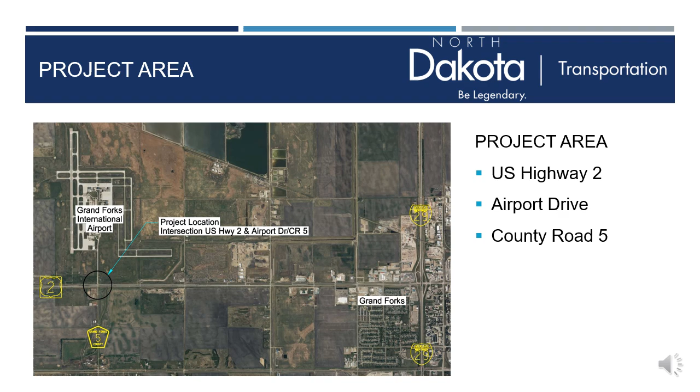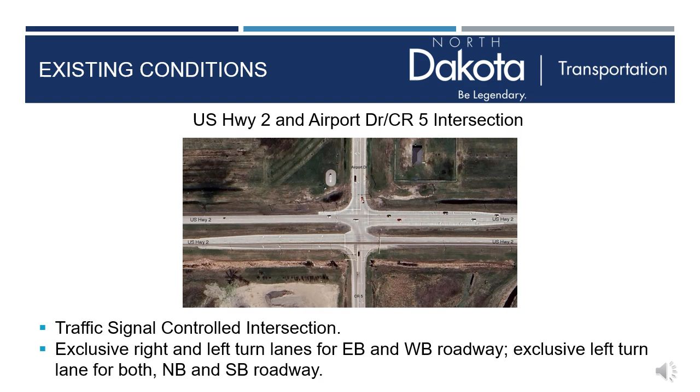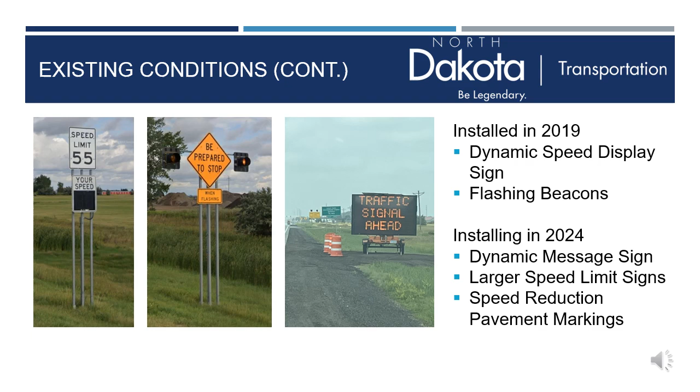The intersection is signal controlled and has exclusive right and left turn lanes for the eastbound and westbound roadways. The connecting roadways, Airport Drive and County Road 5, only have exclusive left turn lanes. Additional devices were installed in 2019, such as the dynamic speed display signs and the flashing beacons. Further changes are planned for 2024 with the placement of dynamic message signs, larger speed limit signs, and special speed reduction pavement markings leading up to the intersection.

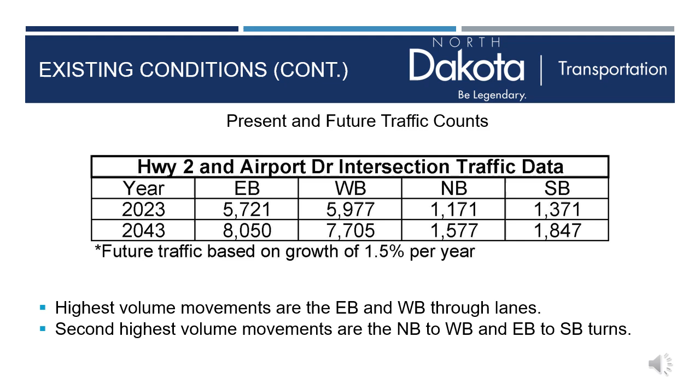This slide shows the present and future traffic counts for the intersection. Further breakdown of the traffic counts shows that the highest volume movements are the eastbound and westbound through lanes. Next are the northbound to westbound and eastbound to southbound turners. These vehicles go to and from the Air Force Base, located approximately 9 miles west of this intersection. Next are the southbound to eastbound and westbound to northbound turners. These vehicles go to and from the airport.

This slide shows the history of crashes that have occurred at this intersection. On the Rural Spot High Crash Location list, this intersection was ranked number 11 out of 25 in 2023, with 45 crashes occurring in the past decade. 12 of those crashes occurred during non-dry conditions, such as wet or icy roads. In the years 2020 and 2021, 14 crashes occurred during road construction, 13 of which were rear-end crashes.

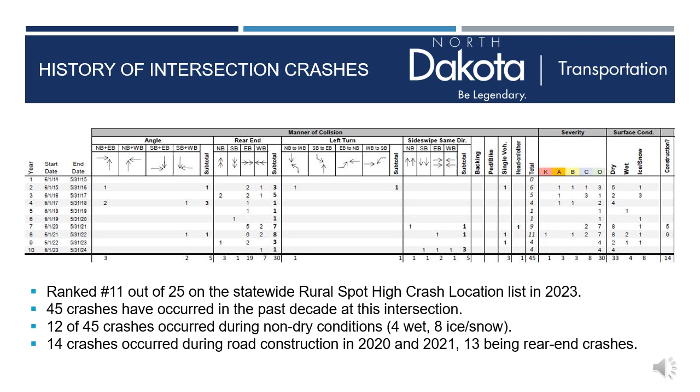Several studies were conducted to analyze this intersection and determine what improvements could be made. In 2014, the NDDOT completed a local road safety plan, and the Grand Forks Metropolitan Planning Organization completed a US Highway 2 Access Study Report that included this intersection. After that, the NDDOT completed a road safety review in November 2017 and 2 traffic operations studies, one in 2019 and another in 2024.

One aspect of analyzing intersection crashes is determining the conflict points. Conflict points are locations where vehicle paths overlap each other. Crossing conflicts are generally more severe than merging or diverging conflicts since vehicles are moving in opposite directions. Conflict points can be used as a safety factor when evaluating intersection configurations, and reducing conflict points can help reduce crashes.

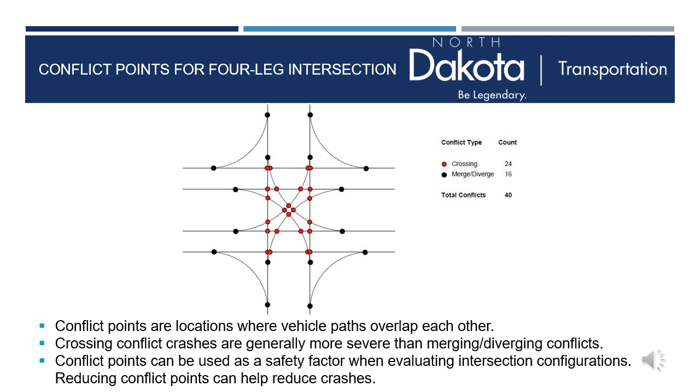Another way to analyze an intersection is to determine the level of service, or LOS. The level of service of a signalized intersection is an assessment based upon the average control delay per vehicle. Currently, the existing intersection has an overall level of service of C.

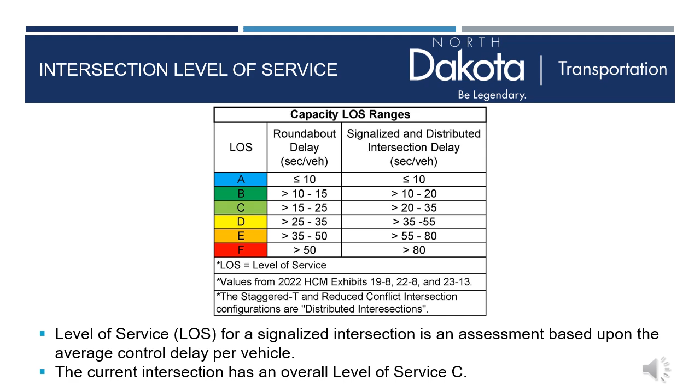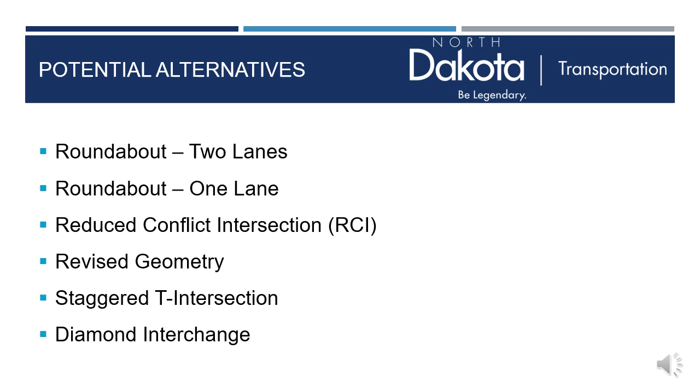This presentation will review 6 potential alternatives: a roundabout with a 2-lane configuration, a roundabout with a 1-lane configuration, a reduced conflict intersection, or RCI, a revision of the existing intersection geometry, a staggered T intersection, and a diamond interchange.

The first alternative is reconstructing the intersection into a 2-lane roundabout. This type of intersection has gained popularity within the last decade. As drivers approach the intersection, they will have to slow down and possibly yield to traffic before entering the intersection, driving around before exiting at their desired road. Including right-turn lanes with this intersection should help with the flow of traffic.

The estimated cost for this alternative is $6 to $7 million and has an estimated construction time within the next 4 years. The advantages for this alternative would include increasing the level of service for the intersection to level A, reducing the number of conflict points from 40 to 16, and reducing crash potential. It would also provide greater operational advantages than the existing intersection configuration, allowing for fewer stops and hard accelerations, reducing idling time, and providing consistent speed for all movements. Long-term cost effectiveness is also an advantage.

The disadvantages include that this alternative would require acquisition of permanent right-of-way and complex construction phasing. While it does provide fewer stops, traffic will need to slow down and yield before entering the roundabout, and larger trucks may encroach on the adjacent lane.

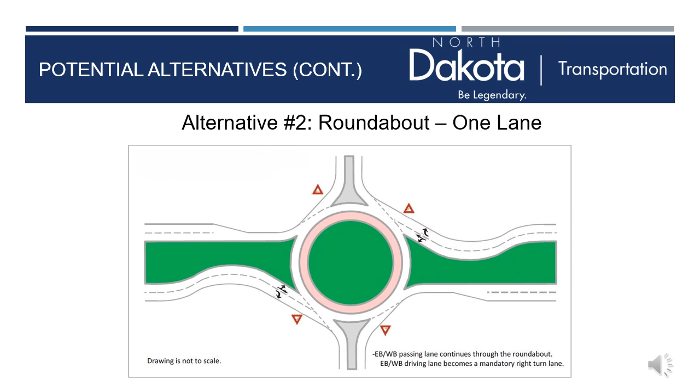The estimated cost for this alternative is $5 to $6 million and an estimated construction time within the next 4 years. The advantages for this alternative would be increasing the level of service for the intersection to level B, reducing the number of conflict points from 40 to 12, and reducing crash potential.

It would also provide greater operational advantages than the existing intersection configuration, allowing for fewer stops and hard accelerations, reducing idling time, and providing consistent speed for all movements. Long-term cost effectiveness is also an advantage.

The disadvantages include that this alternative would require acquisition of permanent right-of-way and complex construction phasing. While it does provide fewer stops, traffic will need to slow down and yield before entering the roundabout, as well as requiring through traffic to merge into the left lane before entering the intersection.

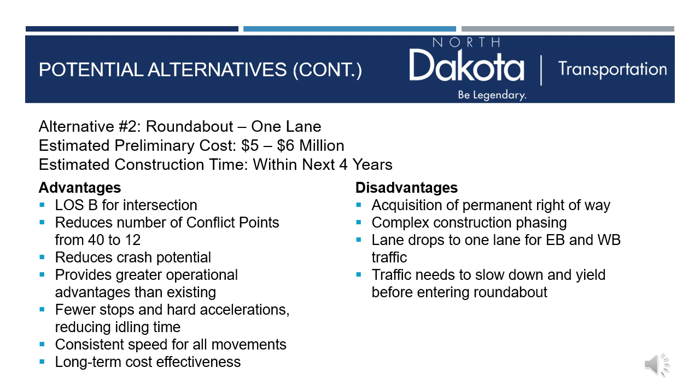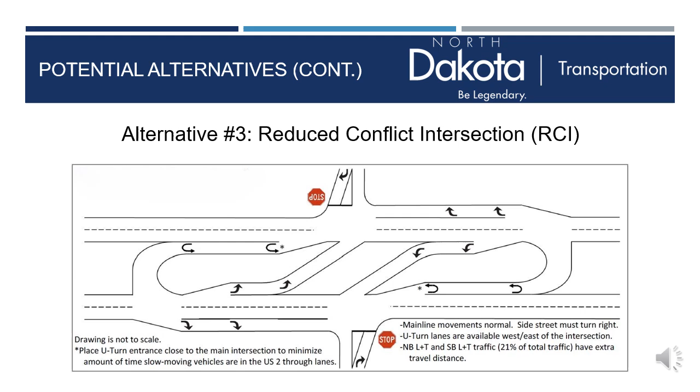The next alternative is reconstructing the intersection into a reduced conflict intersection, or RCI. Traffic on Airport Drive and County Road 5 needing to turn left would be forced to turn right first, then use the provided U-turn area to merge onto their intended direction. Through traffic on US Highway 2 would maintain a continuous flow. The estimated cost for this alternative would be $1 to $2 million and an estimated construction time within the next 4 years.

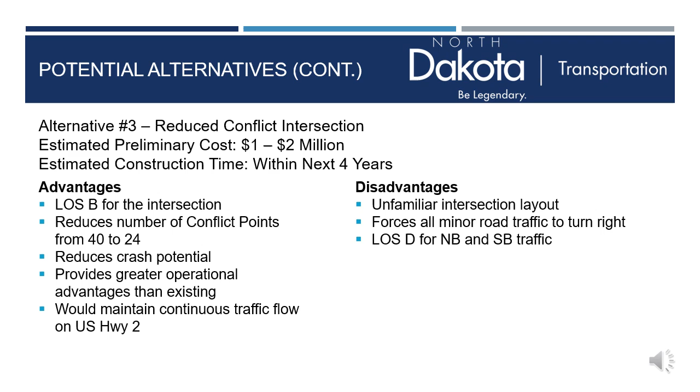The advantages for this alternative would be increasing the level of service for the intersection to level B, reducing the number of conflict points from 40 to 24, and reducing crash potential. It would also provide greater operational advantages than the existing configuration and would maintain continuous traffic flow on US Highway 2. The disadvantages would be that this is an unfamiliar layout. This configuration forces all minor road traffic to turn right, reducing the level of service to D for northbound and southbound traffic.

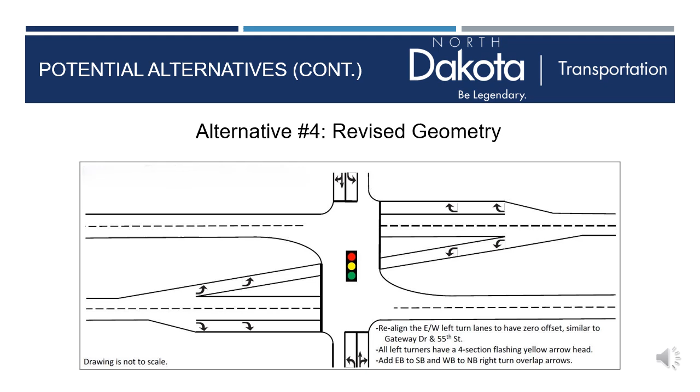The next alternative is revising the geometry of the existing intersection. The main change would be realigning the left turn lanes so that they have zero offset. The existing traffic signal would remain, but the signal heads would be changed. The left turn signals would be replaced with a 4-section flashing yellow arrowhead, and the right turns would have an overlap arrow signal installed.

The estimated cost for this alternative would be $400,000 to $500,000 and has an estimated construction time within the next 4 years. The advantages for this alternative would be no acquisition of permanent right-of-way, allowing for better sight distance for left turn vehicles and storing the left turn traffic farther away from the adjacent mainline traffic. The disadvantages would be that this option does not address the issue with traffic stopping on US Highway 2 and keeps the number of conflict points and level of service at the same level as the existing layout.

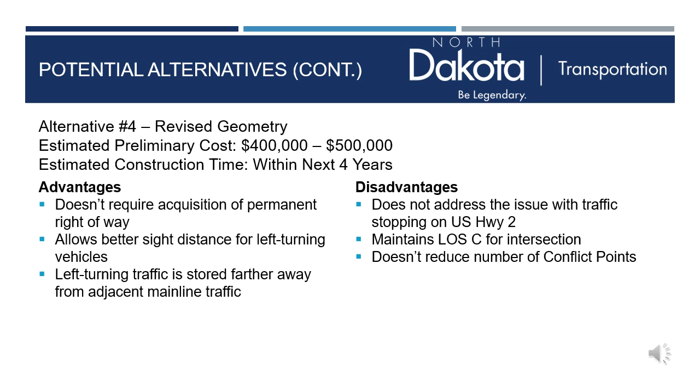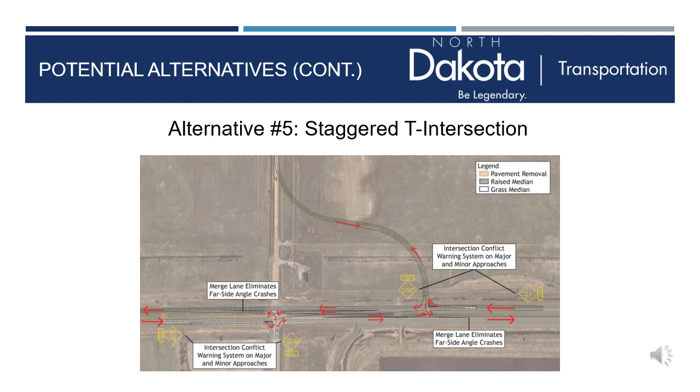The next alternative is reconstructing the intersection into a staggered T-intersection configuration. The airport approach would be shifted roughly 1,000 feet to the east and the traffic signals would be removed. In place of that, the intersection would be two-way stop controlled with the mainline traffic no longer required to stop. New auxiliary lanes would be used to merge left turns onto the main line. An intersection conflict warning system will be implemented to warn drivers on the main line and side streets of a potential conflict.

The estimated cost for this alternative is $3 to $4 million and has an estimated construction time within the next 4 years. The advantages for this alternative would be increasing the level of service for the intersection to level B, reducing the number of conflict points from 40 to 22, and reducing the crash potential. It would also provide greater operational advantages than the existing configuration and would maintain continuous traffic flow on US Highway 2. The disadvantages would be the large impact to the northeast quadrant, requiring acquisition of permanent right-of-way, changing Airport Drive and County Road 5 to stop-controlled approaches, and reducing the level of service for traffic on County Road 5 to level F.

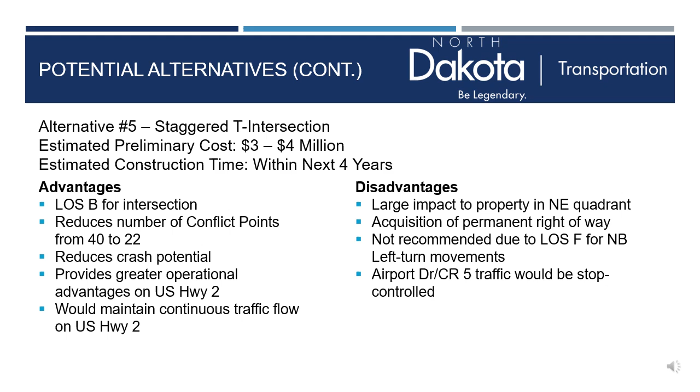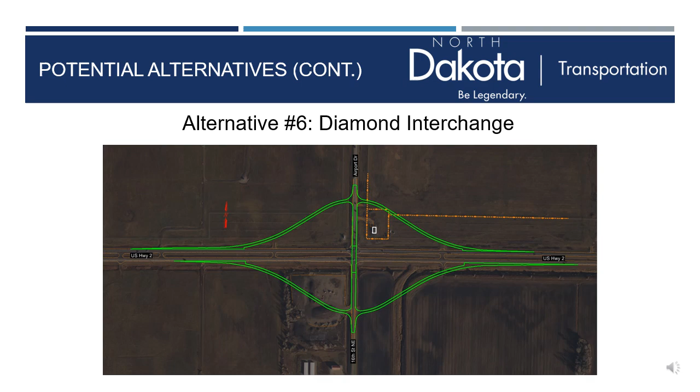The last alternative to present is building a diamond interchange to replace the existing intersection configuration. This would operate the same as other interchanges and would require exiting traffic to stop at the ramp intersections and entering traffic to yield when merging onto the highway. The estimated cost for this alternative is $25 to $35 million and has an estimated construction time of 10 years or more. The advantages for this alternative would be reducing the number of conflict points from 40 to 22, reducing crash potential. This would also provide greater operational advantages than the existing intersection, allowing for continued traffic flow on US Highway 2 and reducing travel time due to less congestion.

The disadvantages would be the difficulty of finding funding due to the high cost, a likely 2-year construction time, a large impact to surrounding properties, acquisition of permanent right-of-way, impact to the nearby legal drain, and relocation of multiple utilities. It would also take longer to acquire the necessary environmental approvals, has potential impacts to the airspace, and might require a lift station to assist with drainage.